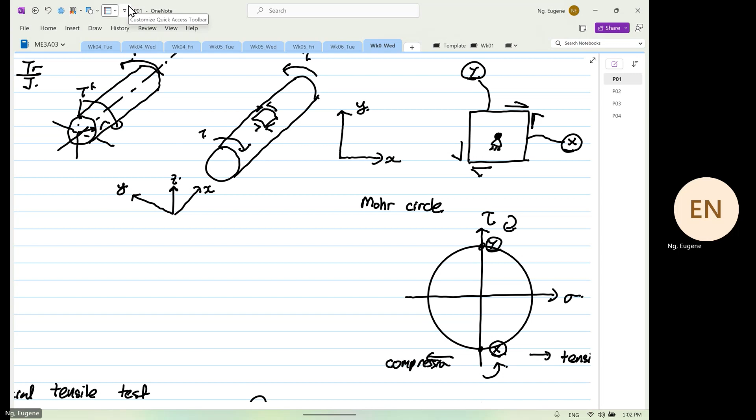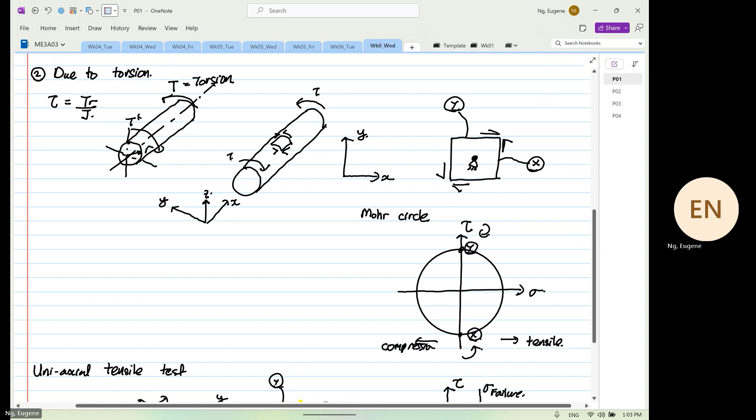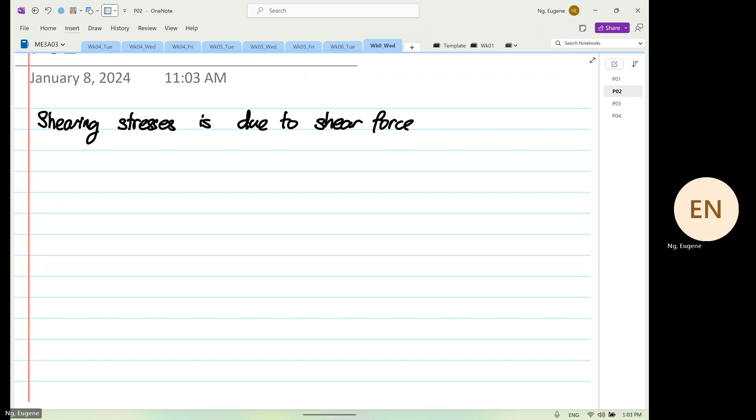So we just completed what? We just completed fracture due to torsion. The next shearing stress is due to shear force. Okay. And this is one of the most complex analyses. If you go to any university, the most they will spend is 3 hours on this lecture.

In the manufacturing and design of aero engines, I did not know anything about shear stress. What did I do? I put a factor of safety, or FOS, of 2. And I was embarrassed. Okay? Because when they talked about shear stress, I was embarrassed. That's where I realized that FOS is full of shit. If you don't know anything, you put a factor of safety of what? 10. Be clear? Okay, so you need to know how shear force is reacting to your structure, and be very sure about it.

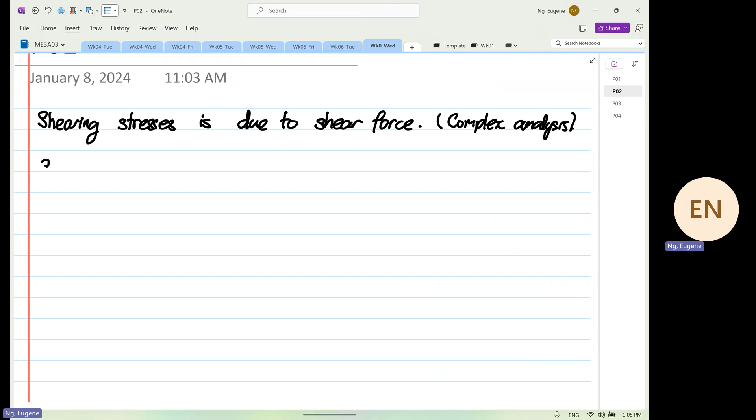Okay? Now, this topic is very easy. Sorry. The formula is very easy. You only have 2 formulas. What are the 2 formulas? So the first formula is q is equal to VQ over I. And q is known as the shear flow. And then you have V is the shear force, followed by Q is the first moment of area.

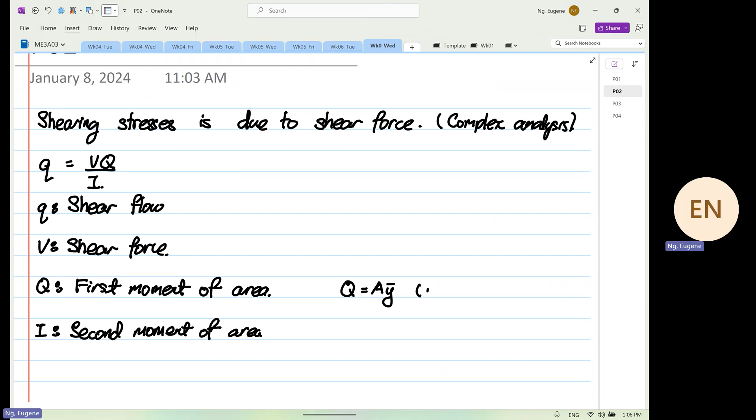And I is the second moment of area. Okay. And if you look at Q, the formula is A Y bar, and the units are in meter cubed. And if you look at I, it's usually width depth cubed over 12. This is meter to the power 4. Shear force is in Newton. What I'm trying to do down here is derive the units. So for shear flow you have Newton meter cubed over meter to the 4. We know that this is Newton per meter for shear flow.

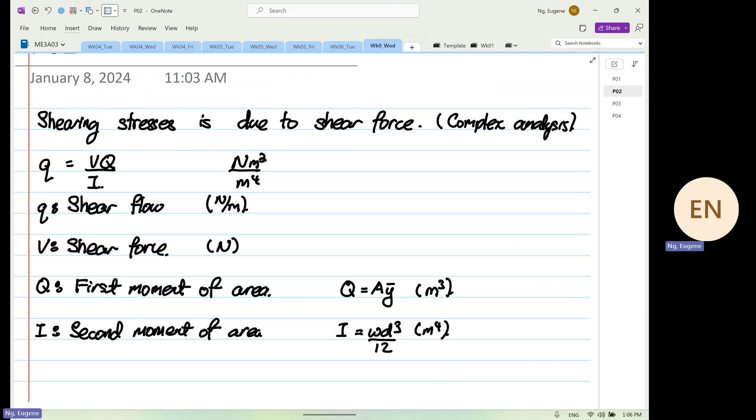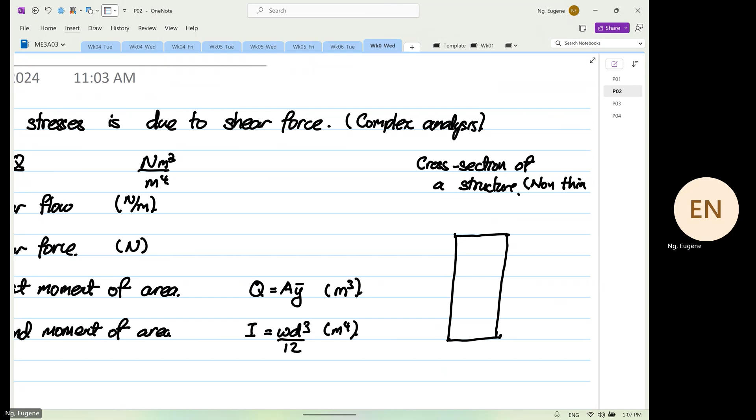Now, visually, what is shear flow? I repeat again, visually, what is shear flow? If we have a cross section of a structure, so I'm going to draw something simple. And the structure, I will put in brackets down here, non-thin wall. Let's say your shear force starts from the top. If I were to draw our transformation, this is the Y, and this is the Z, this is Vy. What will happen is the shear flow will do this. So this is our q.

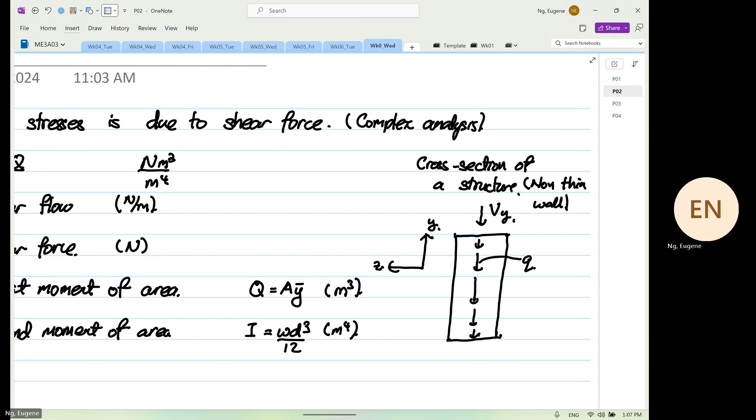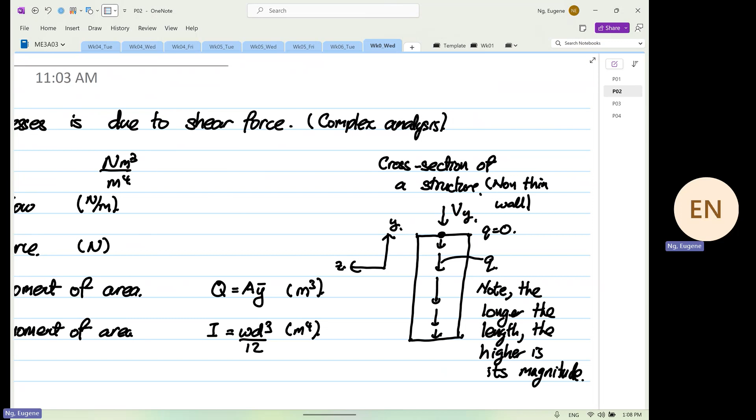Okay. So for shear flow, note: the longer the length, the higher is its magnitude. Okay. The longer the length, the higher is its what? Magnitude. Are we clear? So i.e. at the surface, q is equal to what? 0. Okay. So that is what we know as shear flow.

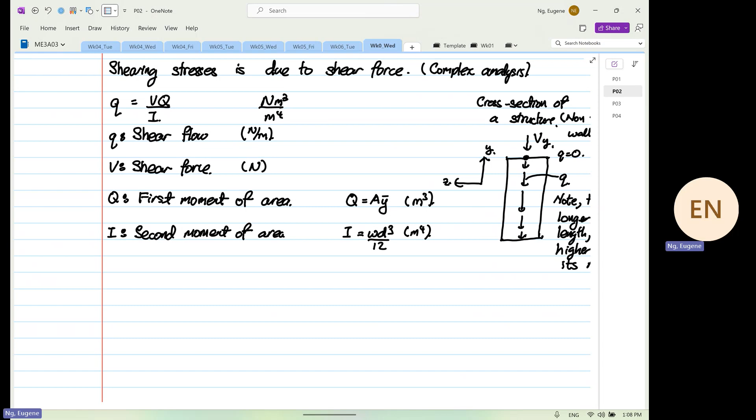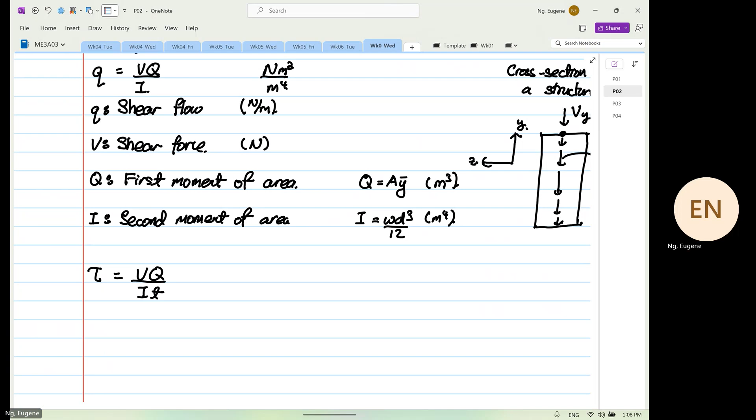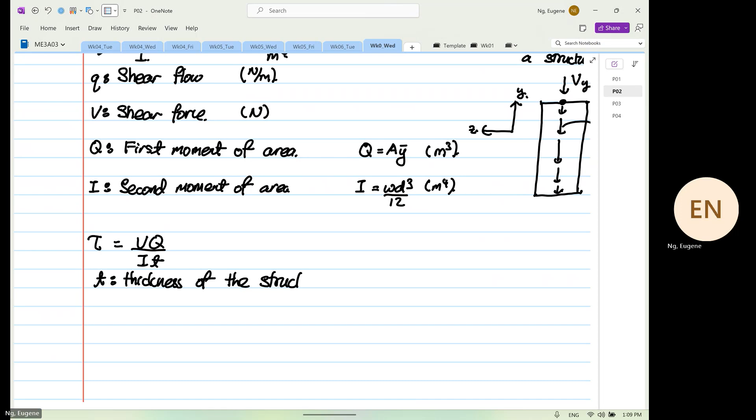The next thing that I'm going to talk to you about, I think you have seen this before with Dr. Koshi, yes or no? Briefly. Were you all tested in 2PO4 on shear stress? Yes or no? So you basically applied that shear stress. Now the next one is shear stress is equal to VQ over IT. So for this case, you all know every term, where t is the thickness of the structure, and it's in meters. So tau, which is your shear stress, is in Newton per meter squared.

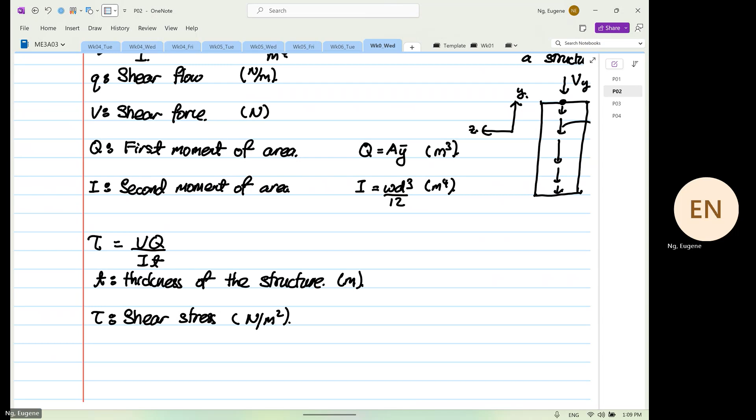Okay. Now, we are a nation that loves everyone and anyone. So we also work in pounds, inch cubed, inch to the 4. Come on, we are a University of Inclusivity, you get what I mean? We have to embrace it, okay? I was told. Are we clear? Okay. We cannot do otherwise. Right.

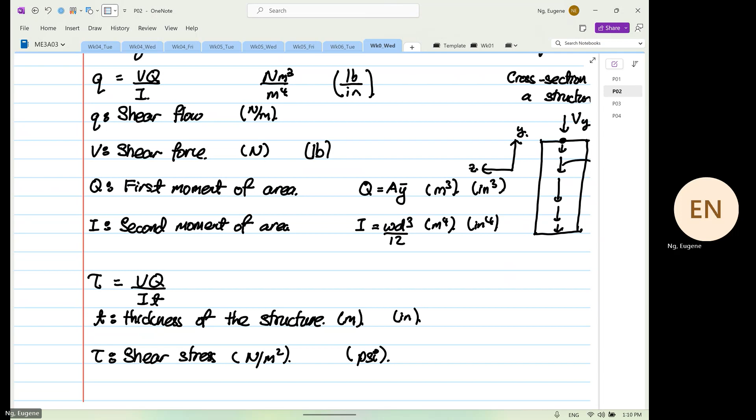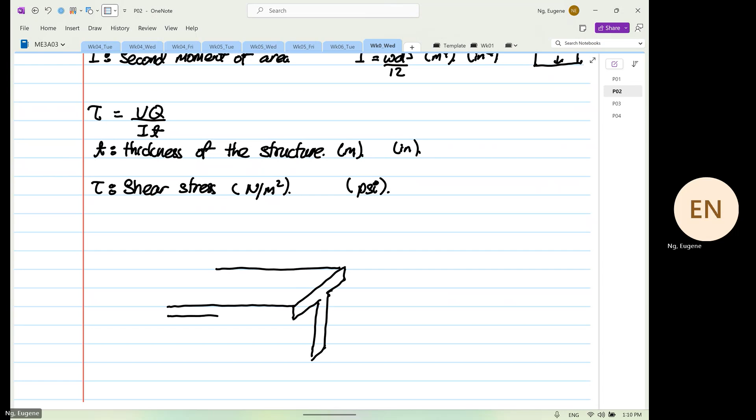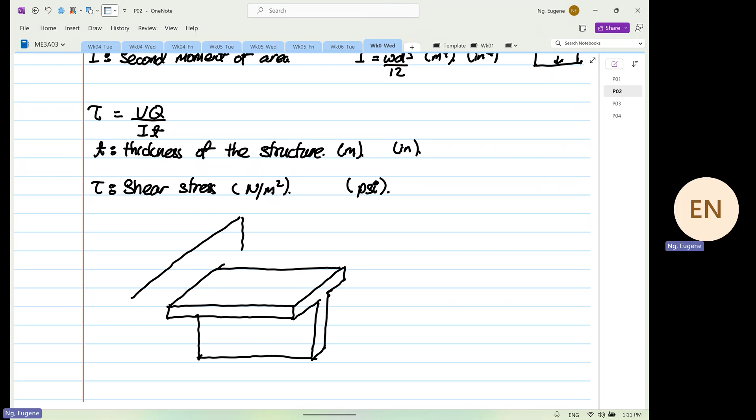And this beam is built into a wall. Okay. And then we have a shear force. Different color. Acting on my Vy. And if I'm going to sketch out the transformation, okay.

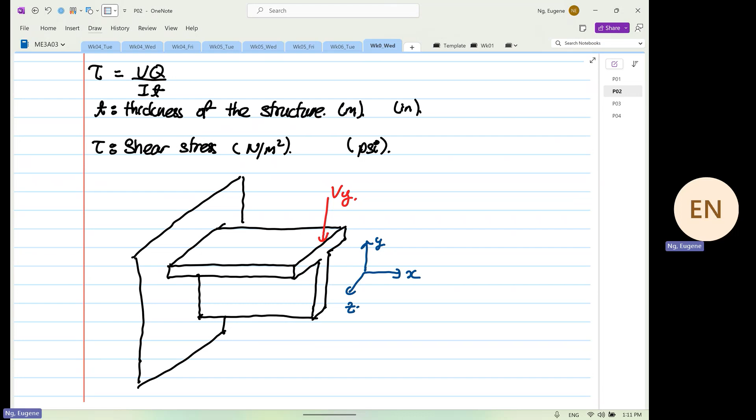When we calculate the area, right, we know that we have two things to consider. You have Q is equal to A y bar, and you have I is equal to BD cubed over what? 12. Just a general formula. And someone tell me, under shear, where would the fracture surface be?

Yeah. Not so much detail. Is it the vertical surface or the horizontal? The vertical surface. So the fracture, why do you say vertical? No, you did not do that. You did not do that. Why? Anyone?

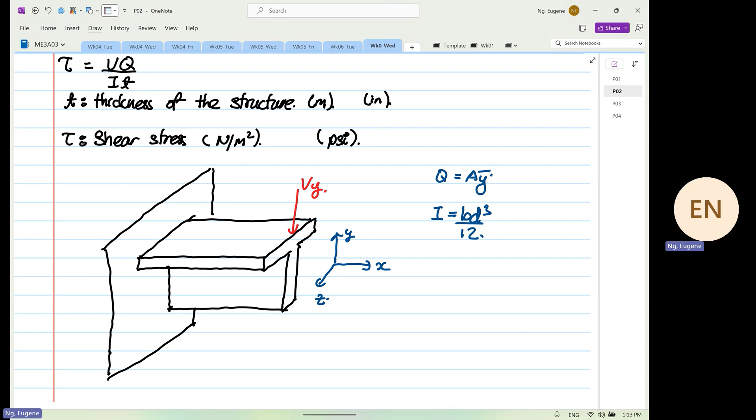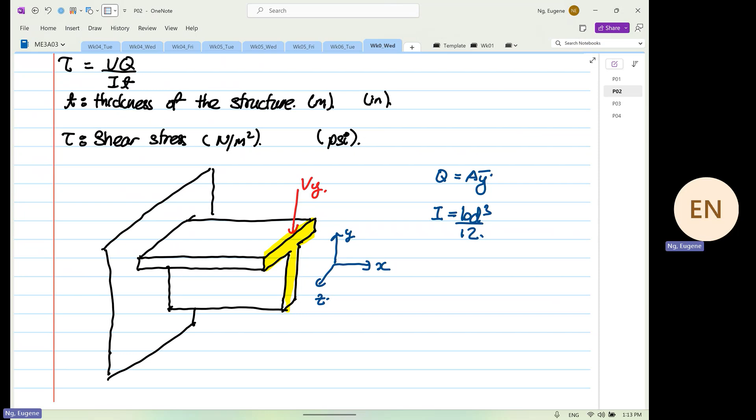Okay? So in shear, we tend to think, right? We tend to think, Eugene, I think failure will tend to occur on this face. Yes? Why do we think that way? Because we have the perception on the concept of this. Shear on the what? Cross-sectional area. Yes or no? Right? Okay. But I'm not saying that this is wrong. This is correct for this situation and this situation only. Repeat again. This is correct for this situation only.

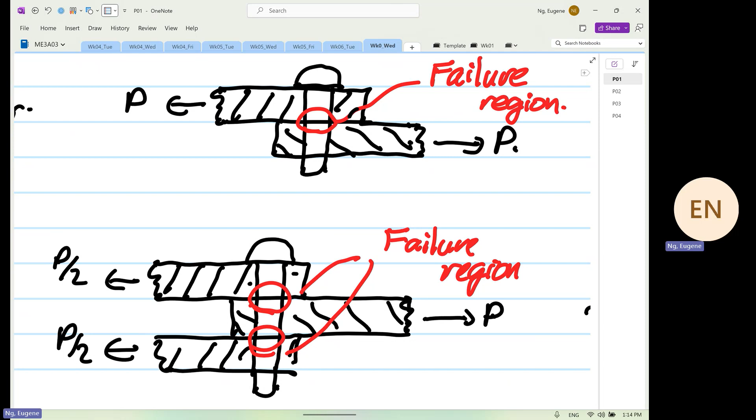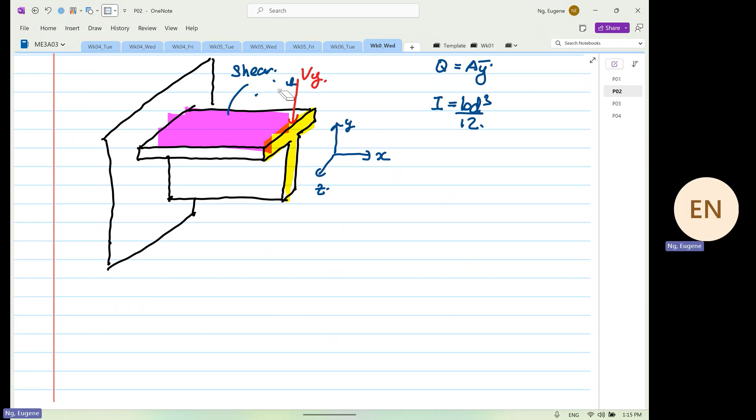But what we are dealing with is not the same. Now we have a what? We have a beam. So which direction will it fail? If I were to tell you that fracture now will occur on the horizontal orientation, you guys are telling me, Eugene, I want my refund back. Yes or no? So the fracture surface, based on shear, is at the horizontal plane. Okay, it's not at the vertical plane.

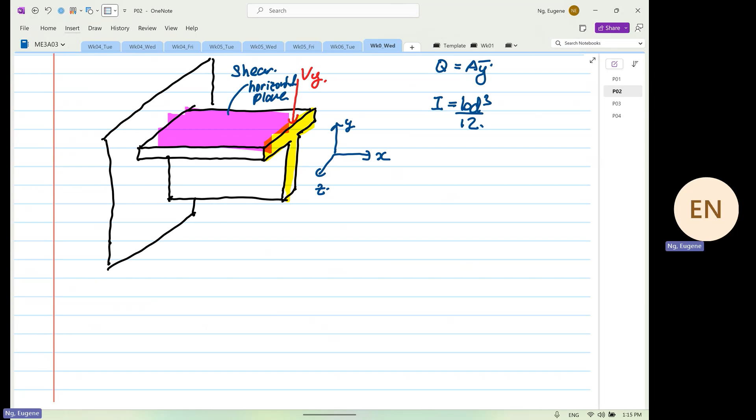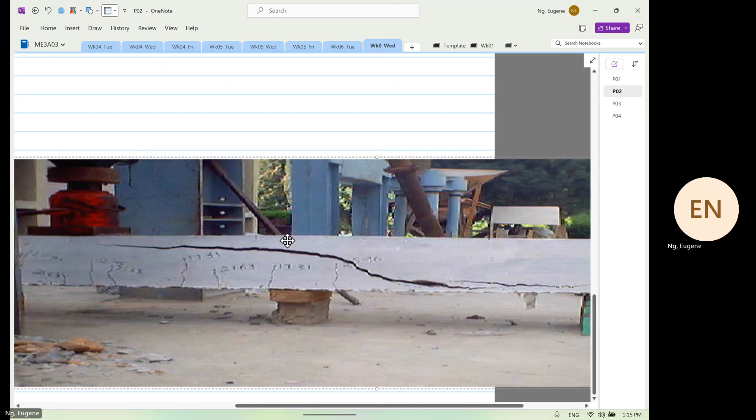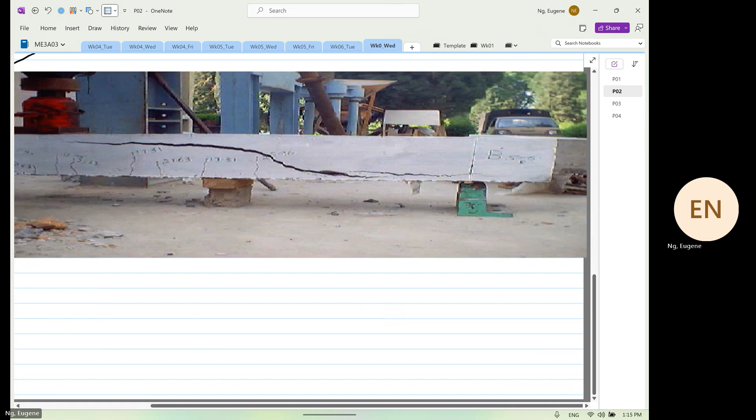Some people are very wealthy. They have the luxury to do a test, concrete beam under pure shearing stress, and you can see the majority of the cracks are running in which direction? Not vertical. Then everyone should be so pissed off, usually. Then why are we looking at the first thing? Why are we looking at the vertical cross-sectional area?

When Dr. Koshi taught you all to calculate the first moment of area and the second moment of area, was it looking at the cross-sectional area? Can you recall? Yes or no? It is. But what did I just show you? Fracture occurs in the what? Now, why did that happen? If you look at this, whatever things, however complex it is, you go back to the fundamentals. Is it right to say that the vertical surface did not fail, but it's the horizontal? We go back to fundamentals.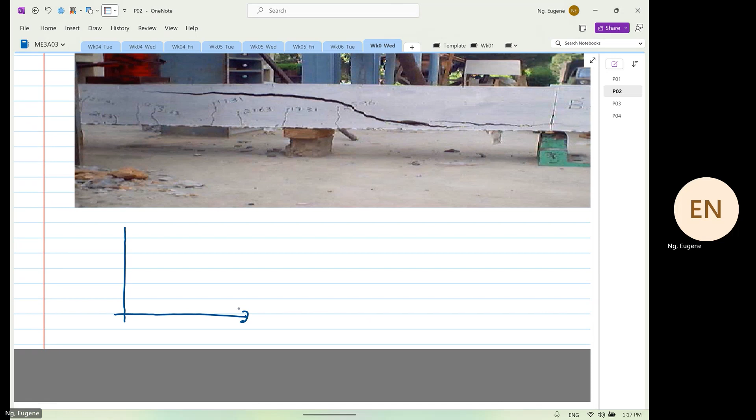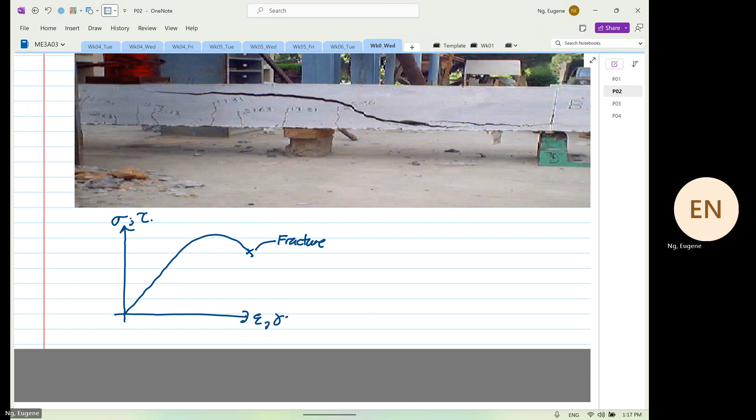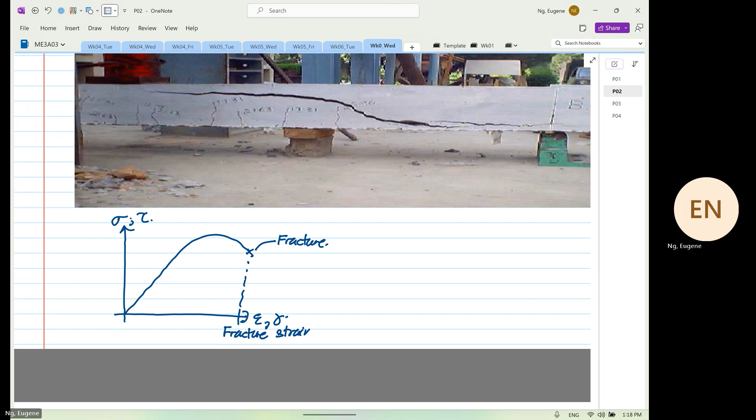So when we go back to fundamentals, what am I talking about? Stress-strain curve. It can be shear strain and shear stress. Okay. This surface will go here, and then you will do this, and then this is where you have your what? Fracture. Okay. Now, let me ask you a very simple question. So you need to have a certain what? Fracture strain. Yes or no? You need to have a certain fracture strain.

Now, coming back to here, if you look at the cross-sectional area, if I were to push a vertical load down, will the cross-section change its shape in terms of geometry? Now, let me rephrase the question. If I were to induce a vertical force, will the dimension deform more in the x direction or in the y direction? Repeat again. The dimension will change more in the x or more in the y? You're doing the right thing.

When you bend your finger, your cross-section area at the tip of the finger is not changing. But however, when you bend your finger, the length is changing. Yes or no? So for that fact, this is why under shear force, the fracture will occur on the horizontal. Then some of you will say, Eugene, you did not explain to me why the vertical area. We will continue on Friday.